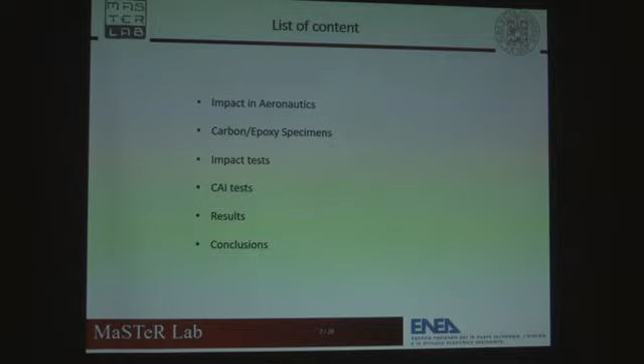In the last 40 years, composites have seen a huge rise in their use in the aeronautical field due to the possibility to have integrated structures with fewer joints and therefore a theoretically lower weight compared to a metallic structure.

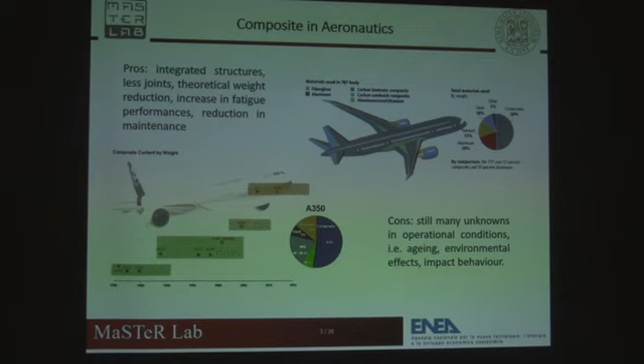On the other hand, there are still many unknowns about composite structures, in particular related to environmental effects and impact behavior. For example, for a metal structure under fatigue loads, we know that the decrease of residual strength is quite gradual and predictable. For a composite, it's not like that.

Even if they could have higher residual strength at the beginning, due to a foreign object impact the residual strength can drop down even under ultimate load, and therefore this could result in a catastrophic failure.

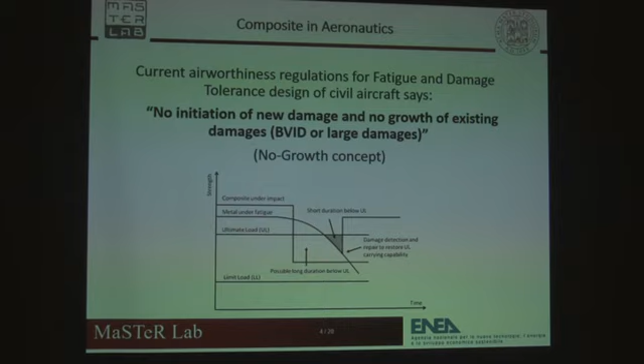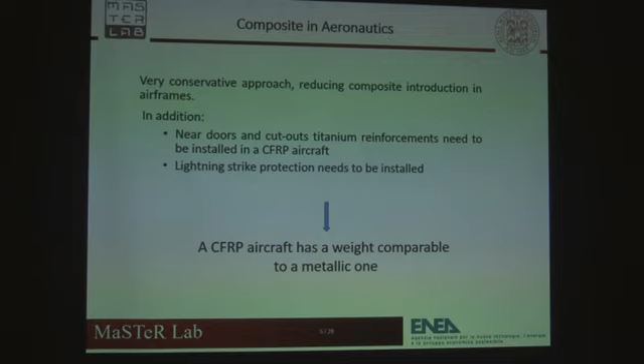Therefore, airworthiness regulation says that if you want to design a new composite structure, you have to apply the no-growth concept: for a new structure, no new damage must nucleate, and if a damage is already there, it must not grow. Therefore, you have to apply really conservative approaches, like for example applying metal reinforcement in the door cutouts, and at the end, a composite aircraft has a weight that is comparable to a classical metal one.

One of the most important issues related to composites in aeronautics is related to impacts. There are many different kinds of impacts and many different kinds of damage that these impacts could create.

But the most dangerous one is known as barely visible impact damage. This kind of damage has no evidence on the structural surface, and even if there is evidence, the indentation is really thin and can be easily skipped during a normal visual inspection. But in the inner part of the structure, there could be delamination or other kinds of damage that could influence structural properties.

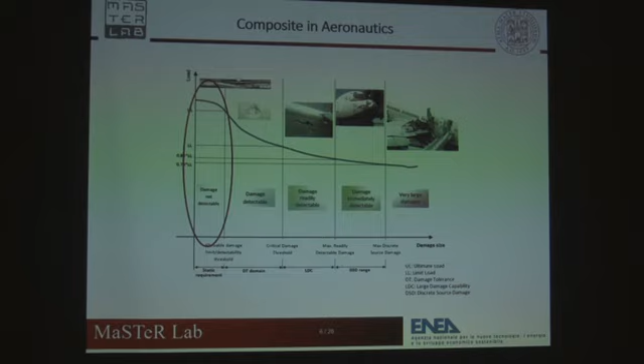And this kind of impact also has a lot of causes. For example, running debris on the landing field, or even maintenance and assembly tools that can fall down. But even a passenger during boarding can hit the door surroundings with their luggage.

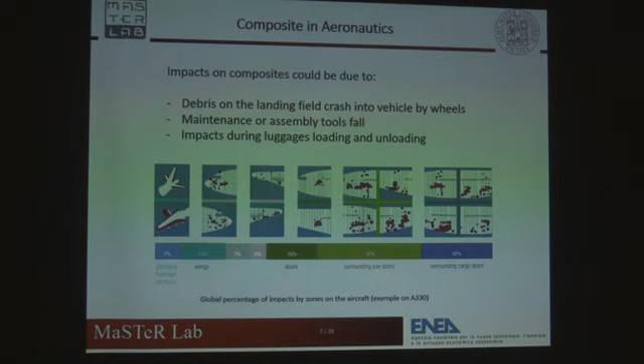So there is a necessity for experimental analysis, and that was the reason that moved us to this kind of research. The first step of this research was presented at the previous IGF meeting in 2015, and that experimental campaign was conducted on 2.6 mm carbon epoxy specimens with 2 different energy levels and 2 different impact locations.

We saw that even a really low energy impact on this kind of material is really effective on its compressive residual strength, and the location of the impact is really important. So we wanted to take a step forward in this direction, trying to find out the thickness influence on impact behavior for a carbon epoxy.

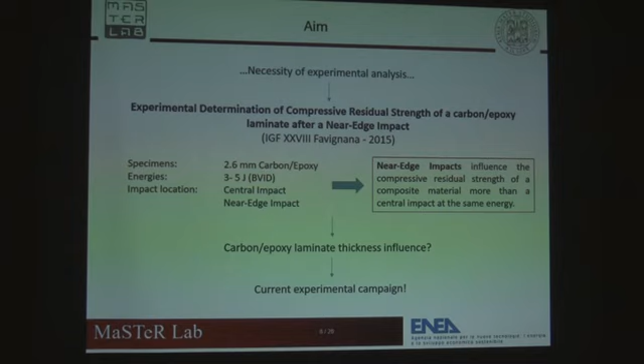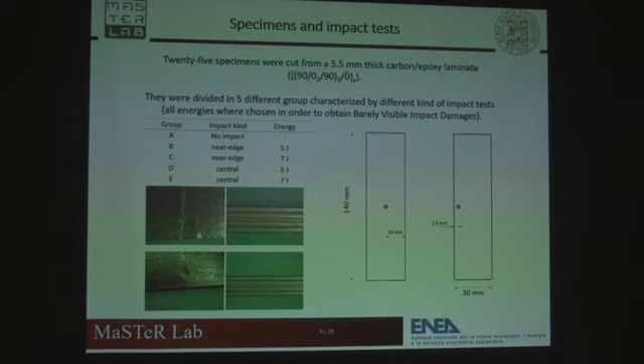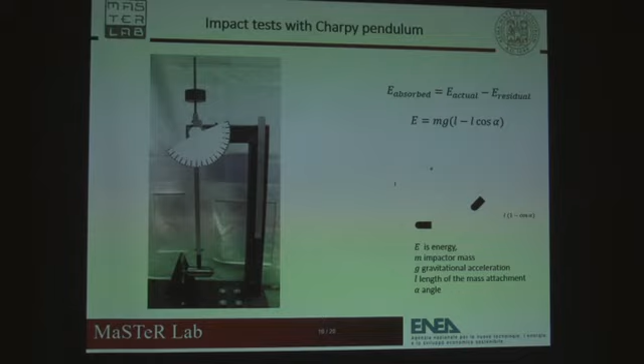All the impact tests were performed by means of a modified Charpy pendulum. Each test was filmed, and each video was watched in slow motion to capture the real initial angle and the bounce angle, in order to obtain the actual energy, the residual energy, and to calculate the energy absorbed by the specimen.

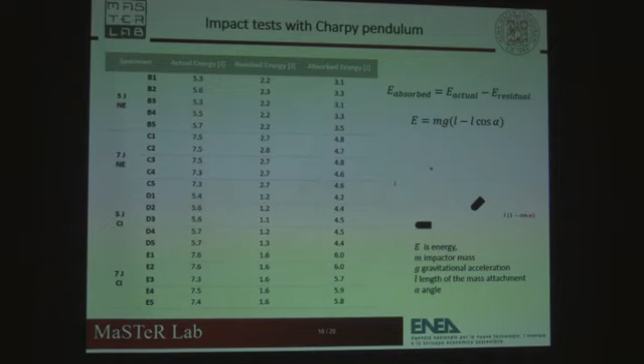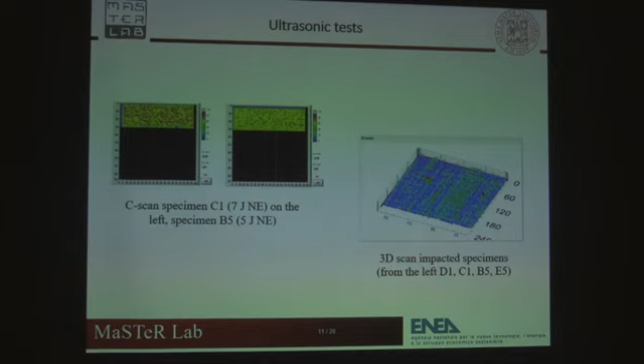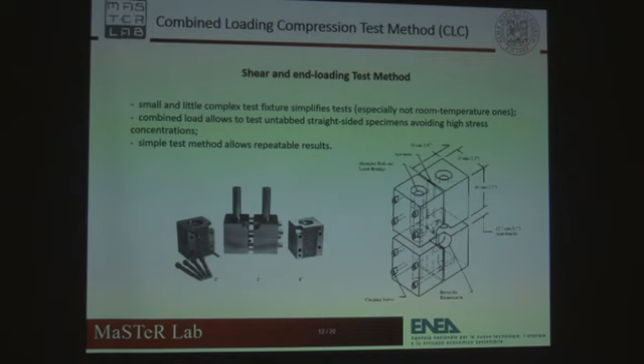To check the influence of the impact damage on compressive residual strength, and therefore to perform a compression after impact test, we chose to use the combined loading compression test method due to its many advantages compared to other kinds of compressive fixtures.

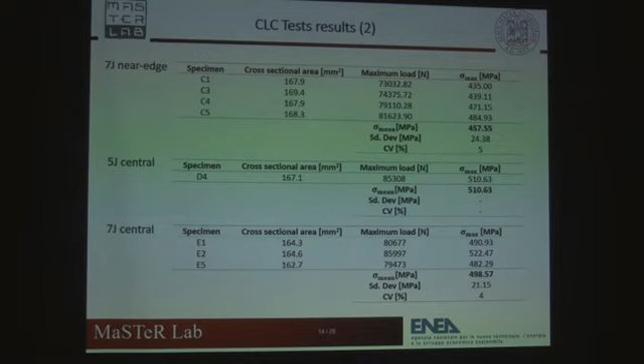Those are the results for the pristine material, for the 5 joule near edge impacted specimen, 7 joule near edge, 5 joule central impact, and 7 joule central impact. Here the results are summarized. This table refers to the present experimental campaign, and you can see that the difference between all the mean values of the groups is not really high. There is a slight reduction in compressive residual strength for the near edge impacted specimen.

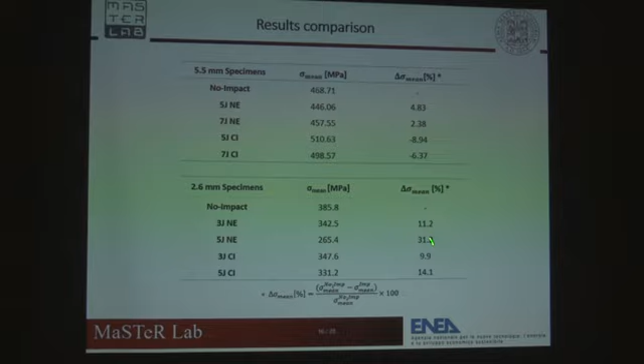While in the previous campaign with a thinner specimen, just 2.6 millimeter thick material, we saw that the difference was really huge. All the impacted specimens had a reduction in compressive residual strength, and the location was really important because that reduction was much higher. If we compare the 5 joule near edge impacted specimen from both experimental campaigns, we can see this clearly: for the thin material, there was a reduction of around 31%, while for the thicker one, a 5.5 millimeter carbon epoxy, the reduction is around 5%.

Therefore, there is not a clear evidence of the impact influence on the compressive residual strength of this kind of thick material.

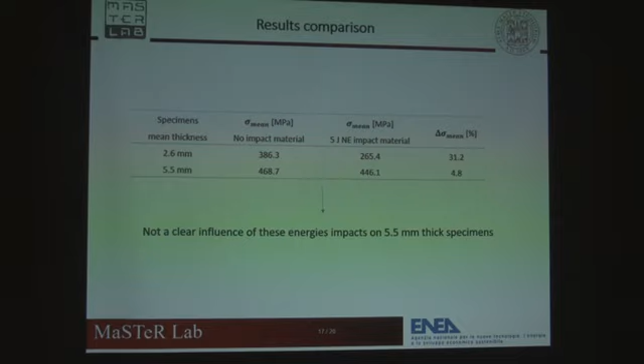What we have seen is that for a thin material, 2.6 millimeter thick carbon epoxy, even a really low energy impact is really important and effective on the compression after impact, on the compressive residual strength, and the location is really important for that kind of thickness. But when you have a thick specimen, in this case a 5.5 millimeter thick material, this influence is not so clear, and you have just a slight reduction for the near edge impacted specimen.

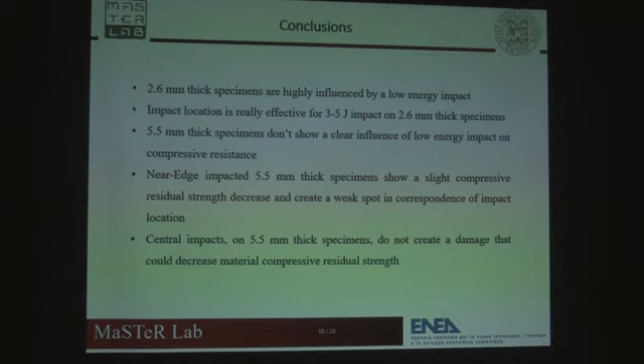But there are two things we can underline from this experimental campaign. First, during the compressive tests, we saw that the near edge impacted specimen failed more easily than the others in the gauge section, where the damage was, while the centrally impacted specimens didn't behave that way. Therefore, even if the influence on the compressive residual strength is light, the near edge impact still creates a weak spot in the material and a trigger for the damage, making the near edge impact still more dangerous than a central one.

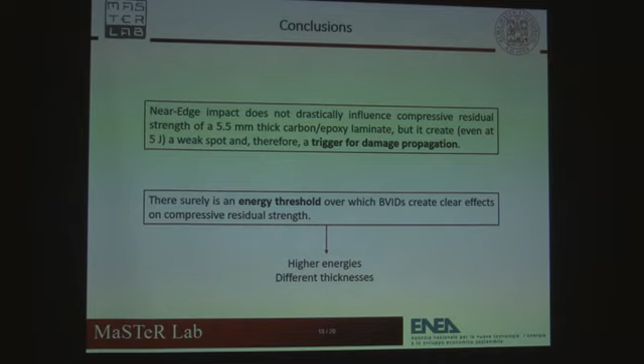Second, we saw that there is an energy threshold for impact, or for low impact behavior, in carbon epoxy. Under this threshold, even if the impact creates damage, this damage doesn't really have effects on the compressive residual strength of the material. The next step could be to test higher energy with this kind of thickness, or even different thicknesses, in order to correlate material thickness with this energy threshold.